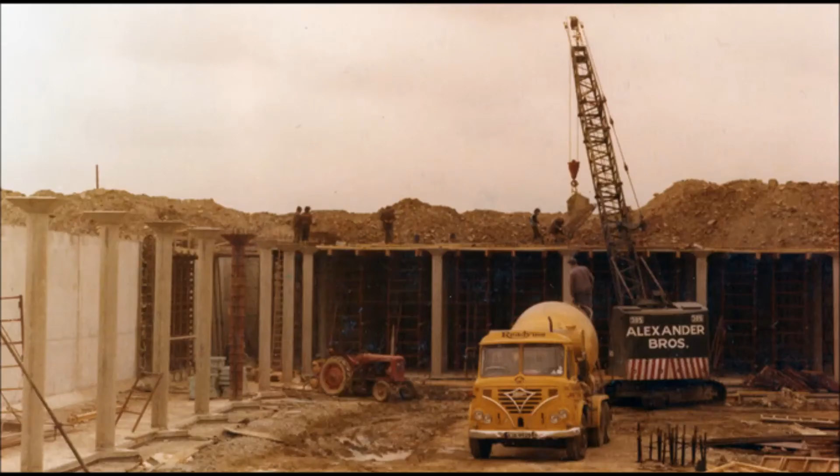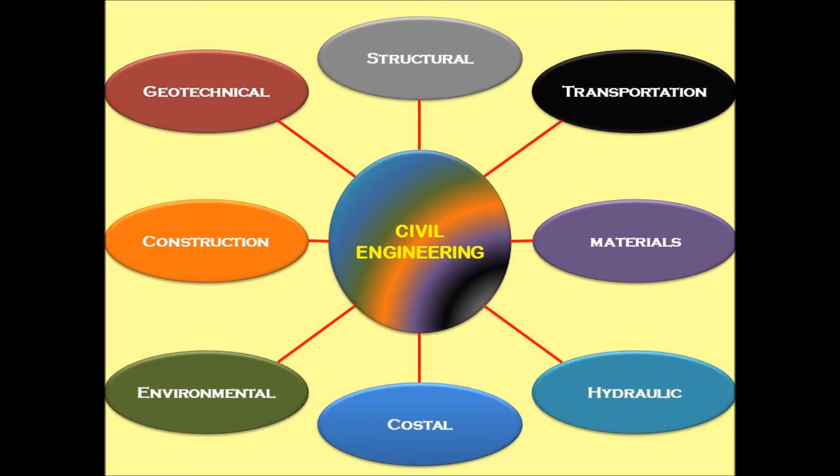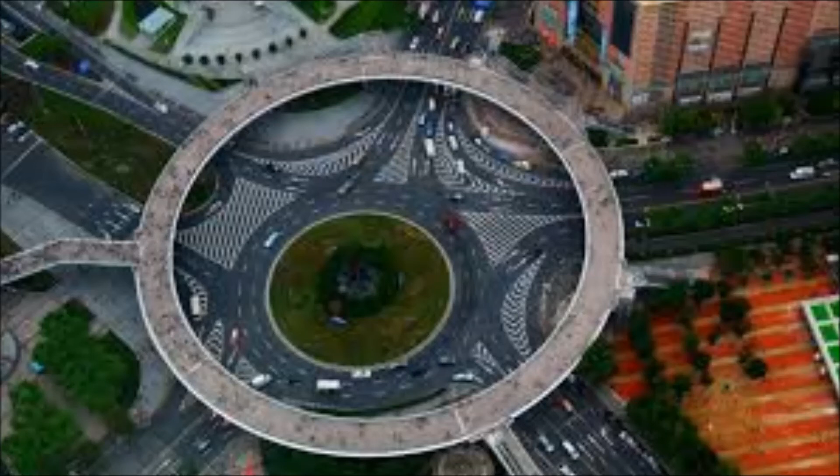Civil engineers often specialize in one of a number of technological areas. A few examples: Transportation engineering is the application of technology, scientific principles, and integrated strategy, focused on smart and sustainable developments to planning, functional design, operations and management facilities for any modes of transportation for movement of people and goods.

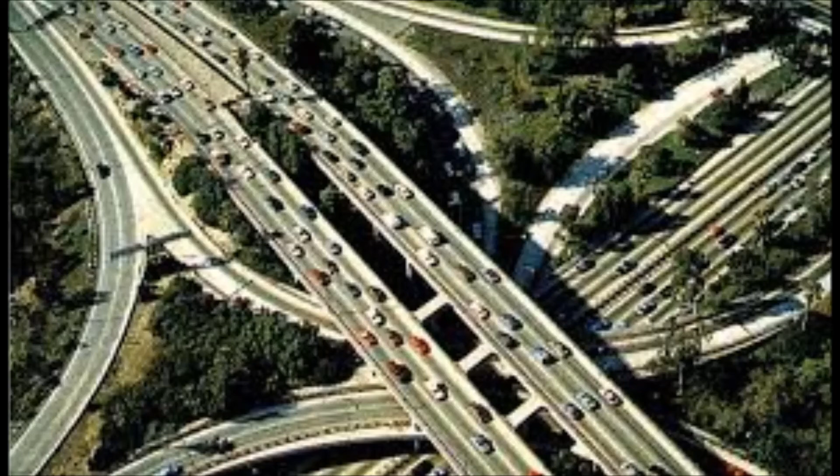Coastal engineering is the practice of civil engineering and other disciplines in the sustainable development, professional work, and restoration of coastal, ocean, ports, waterways, riverland, and wetland resources.

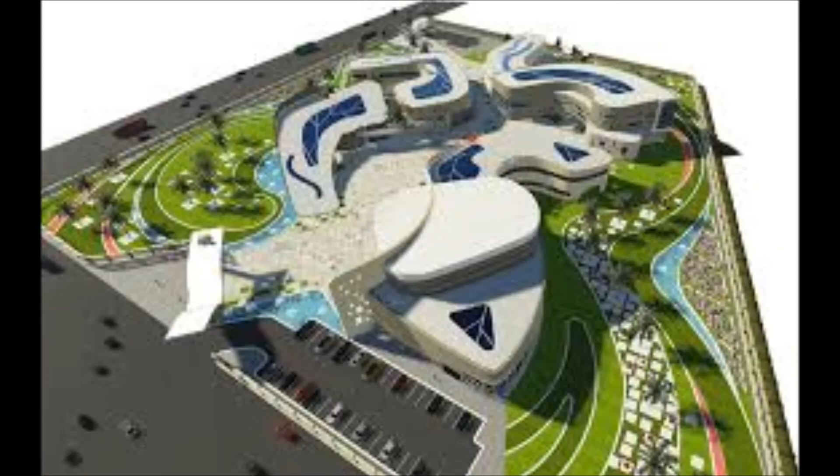In structural and construction engineering: planning and execution, transportation of material, and site development based on hydraulic, environmental, structural, and geotechnical engineering.

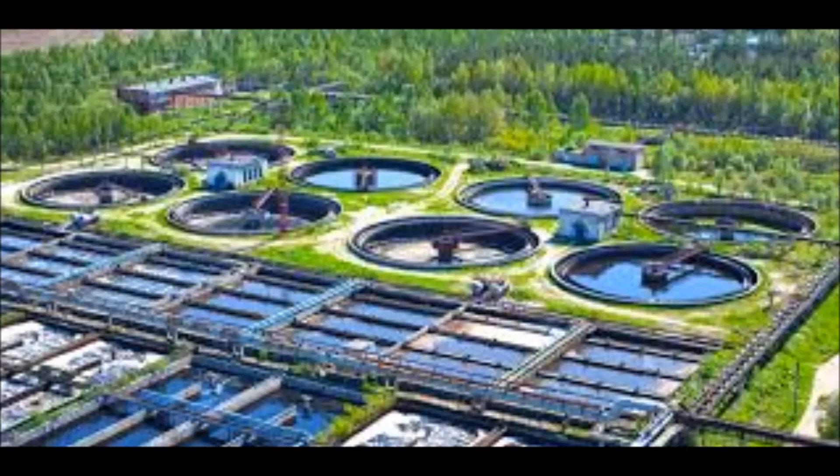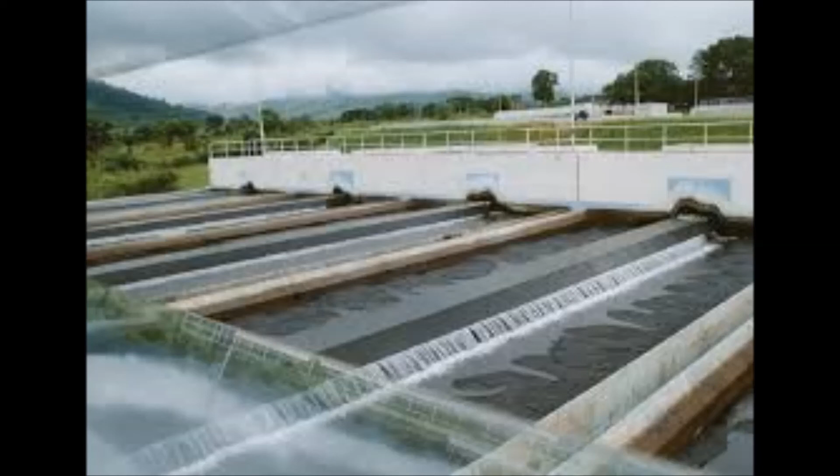Environmental and water resources engineering provides advanced water resources and environmental solutions to achieve a sustainable future through integration of technical expertise and public policy in the planning, design, construction, and operations of environmentally sound and sustainable infrastructure impacting air, land, and water resources.

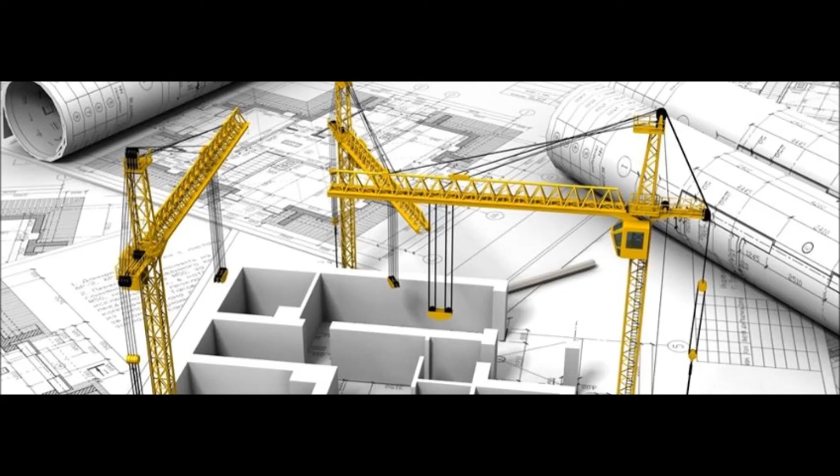Architectural engineering is the application of engineering principles and technology to building design and construction. Architectural engineers work together with architects and civil engineers, but are unique in both their skills and roles as part of the building design team and other specialties.

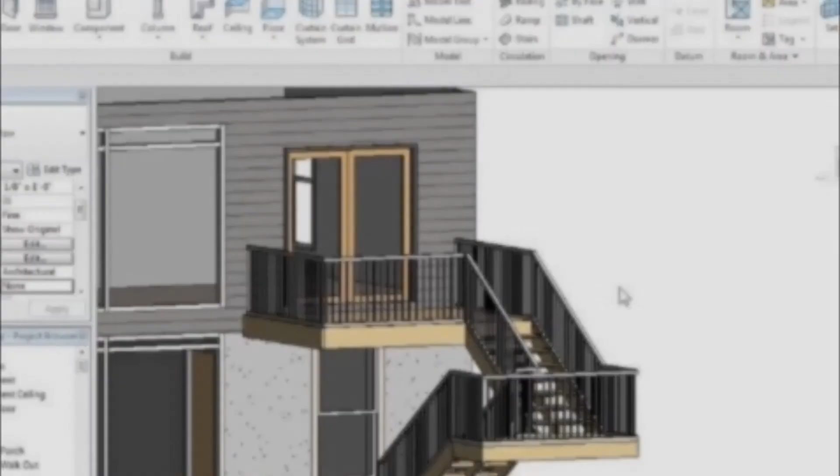From the earliest annals of history to modern times, there are numerous creations that showcase our ability to realize an incredible constructive vision. While every engineer or anyone who fabricates structures may have their own opinion on what engineering project is most impressive, it can be assumed that these 10 would be placed at the top.

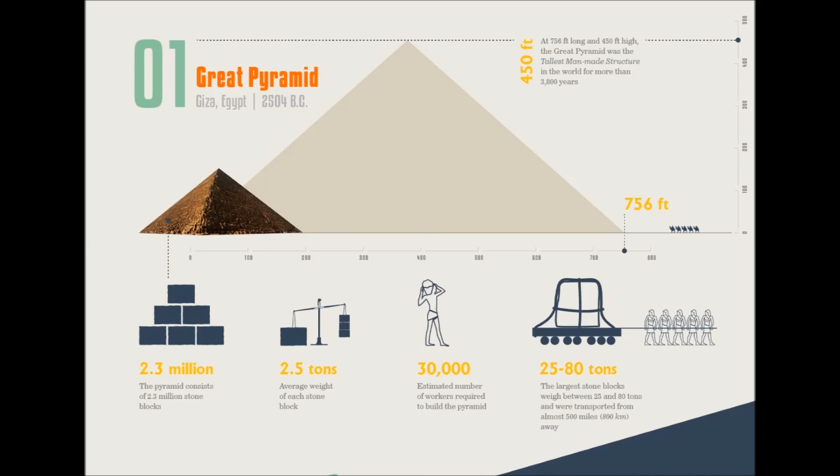Great Pyramid of Giza: This incredible creation consisted of 2.3 million stone blocks, which required the constant labor of 30,000 laborers to build.

Great Wall of China: What many people don't know about this enormous 5,500-mile-long wall is that the mortar used in its construction is made of rice flour.

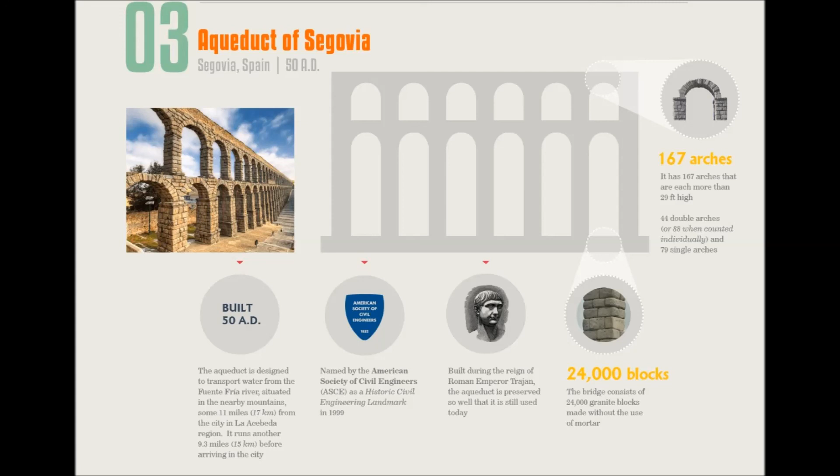Aqueduct of Segovia: These amazing aqueducts were made without the use of mortar and are so well preserved that they are still in use today.

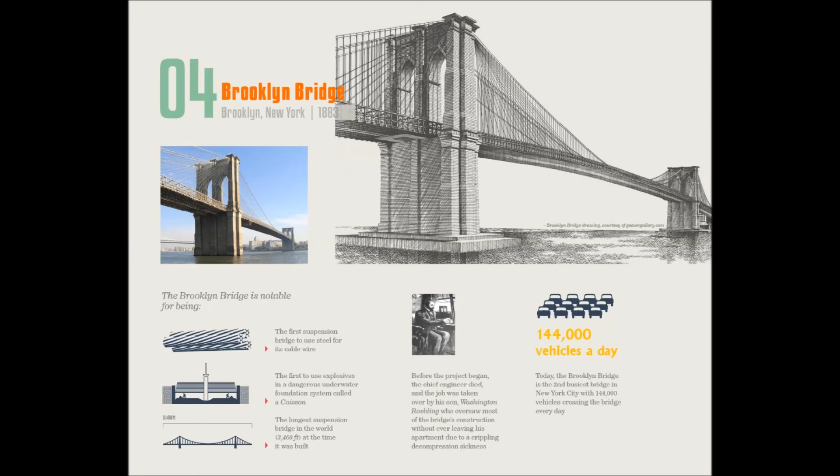Panama Canal: This man-made channel was designed to connect the Atlantic and the Pacific Oceans to provide trade ships with passage between North and South America.

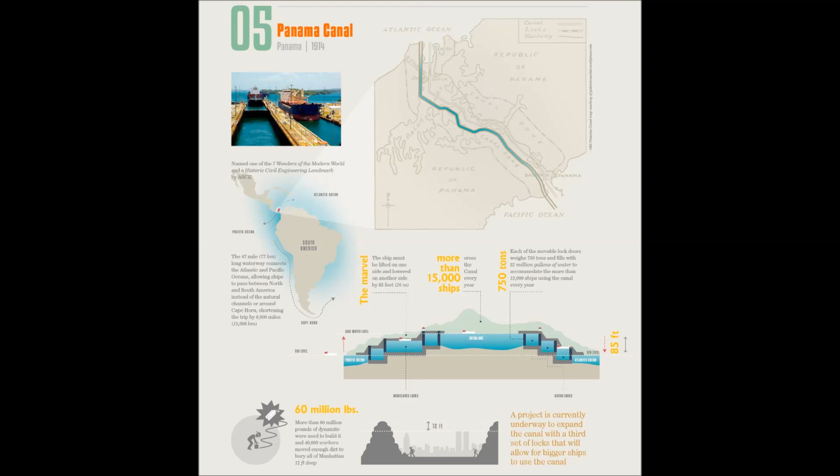Hoover Dam: Named one of the 7 wonders of the modern world, the dam generates 4 billion kilowatt hours of electricity for use.

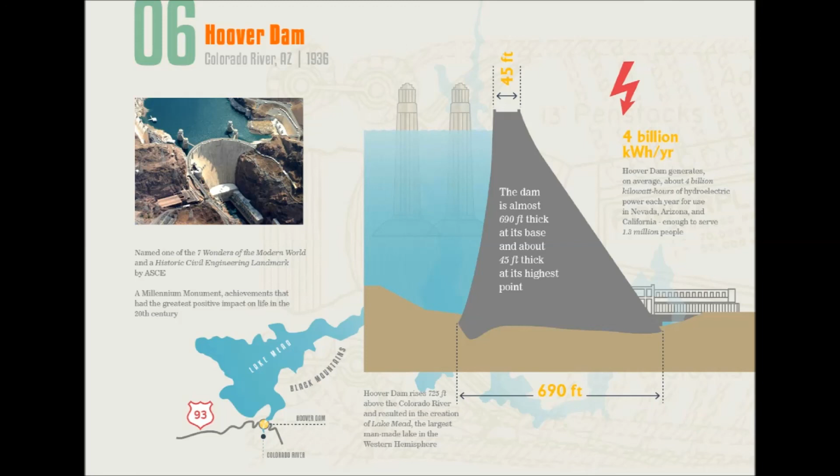Golden Gate Bridge: This historic wonder connects San Francisco to the rest of the bay and is made up of 600,000 rivets.

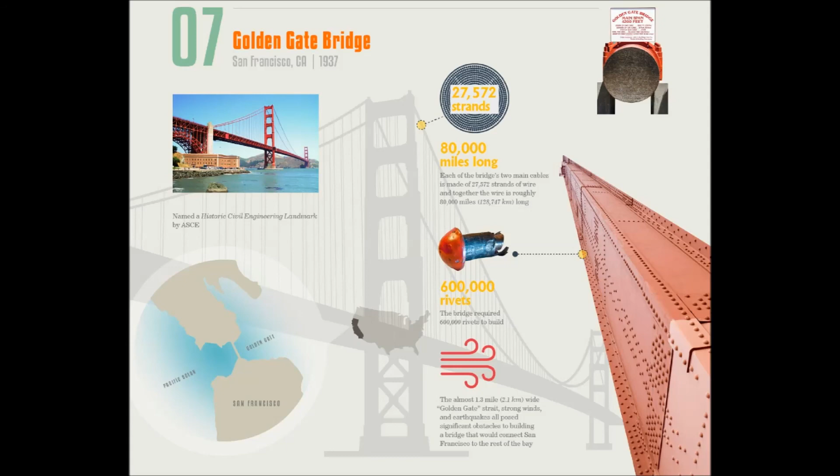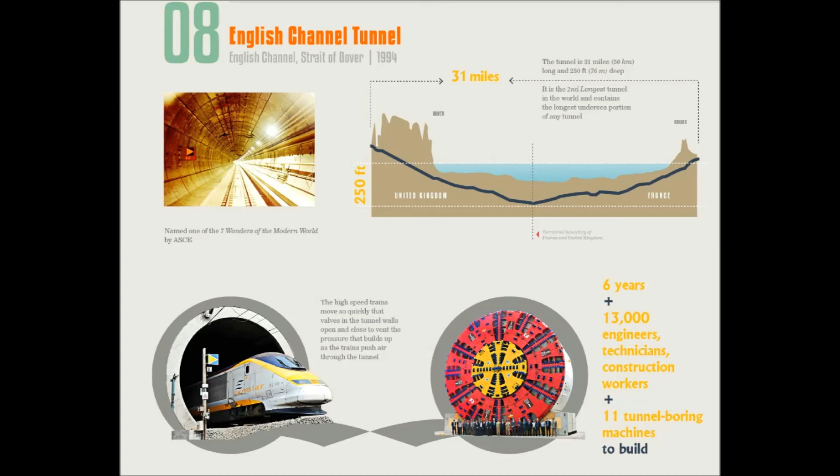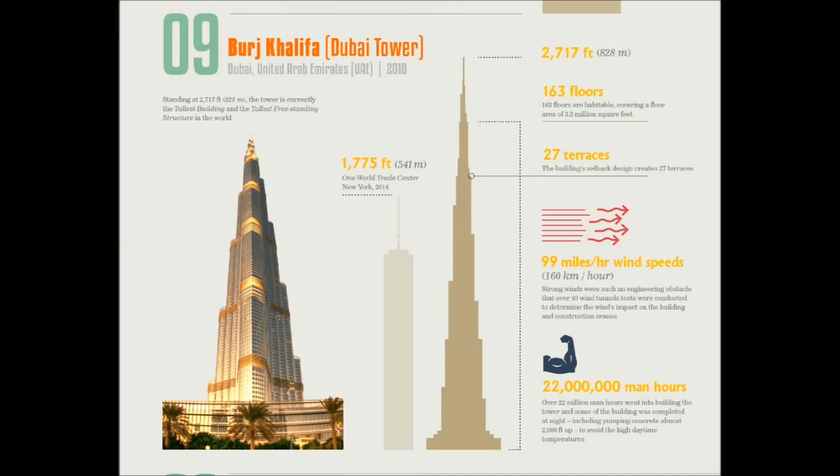Burj Khalifa: Interestingly enough, one of the biggest setbacks to face the construction of the Burj Khalifa, the world's tallest building, was 160 km/h winds that required special testing to determine the safety of the construction material. More information about this building in this flowchart.

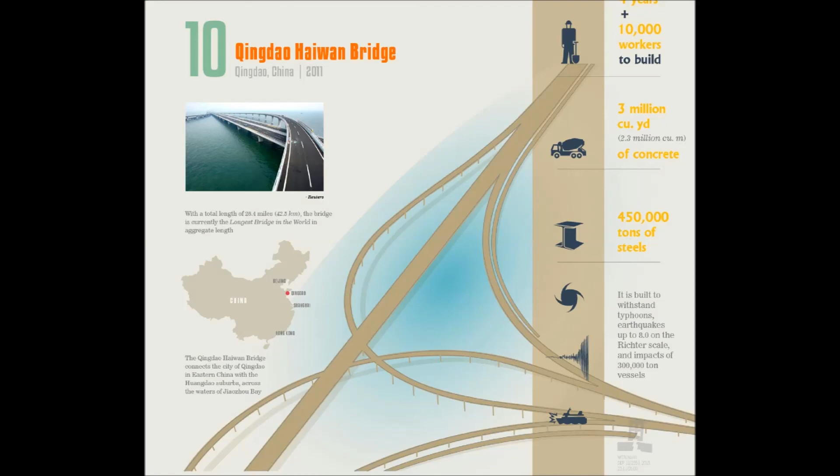Civil engineering is an exciting profession because at the end of the day you can see the result of your work, whether it's a completed bridge, subway station, hydroelectric dam, or high-rise building.